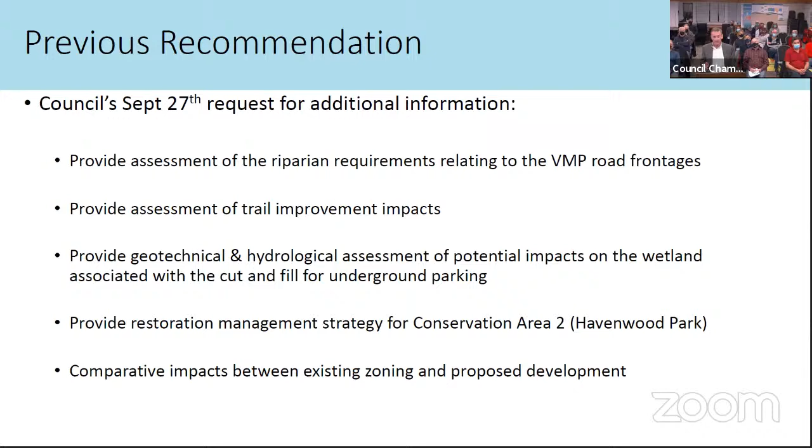If we can go to the next slide, I'll flip through these quickly. These are the motions, either direct or indirect, that came up from the last conversation: about the riparian assessment areas, about the impacts of trail improvements, and item number 3, an important one, related to the hydrogeology and geotech impacts of the underground parking on the wetland. Then the restoration management strategy for conservation area 2, which is the park, and conservation area 1, which is inside the development area but right adjacent to the park. Finally, the comparative impacts between the existing zoning — particularly on the west side of VMP — and the proposed development. Next slide, please.

These were the list of reports that were submitted to you, and you should have in your package. I won't go through them, but they were all accompanied by the resolution or motion that was adopted.

Next slide, please. Again, as was commented earlier, this project has been going on for at least 2 years in a meaningful way. There have been changes made. As you can see on the left-hand side, there's something in the order of 14 scientific or technical studies that have been done. In my experience over 50 years, I have never seen a project that has had that much study done.

And the variety of studies that were done pertaining to this project. And finally, you can see the list of about 10 different consulting firms that have been involved in this project. Next slide, please.

I'm going to ask Patrick to come forward. Patrick is asked to do 2 things, and he will speak to them quickly in the next slide: to look at the impact on the riparian areas, particularly as it relates to VMP and the widening of the road relative to the creek on the east side, and the riparian area on the west side. There was also a strong request to examine the impact of the trail systems proposed within the riparian area, or at least within the extra 15 meters beyond the first 15 meters. So if you could go to the next slide, please.

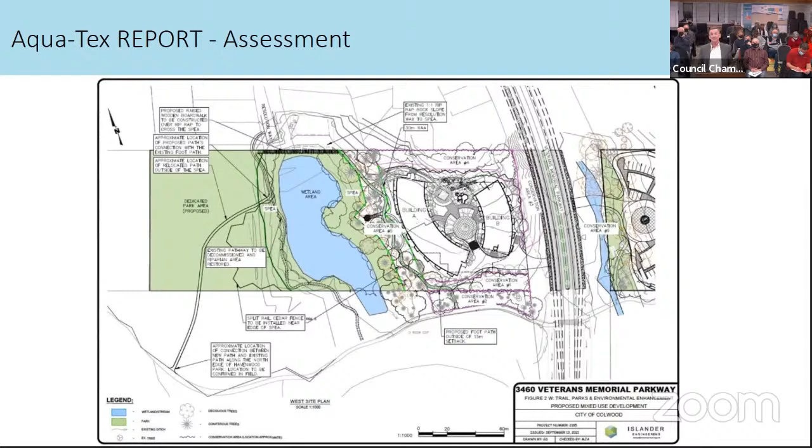These were strictly excerpts from the two studies, and we also asked the blaster to assess it, who has the practical aspect of it. From a geotechnical point of view, the analysis was to look at the rock formation and the potential impact as it relates to the wetland area.

Hydrologically, which was also raised, I might let Michael Payne, who was retained to look at whether there would be an impact on the wetland as a result of the blasting caused by the underground parking, which has 3 layers. I've taken an excerpt from his study, but since this was so important, I'll ask if Michael could say a couple of words. Michael, are you on the line?

Possibly. Yes, I'm here, hang on a second. Can you hear me, see me, a little bit of both perhaps? We can hear you and see you.

Okay, very good. Just a couple of comments on my review. Hello and good evening to the city of Colwood. My name is Michael Payne. I am a professional groundwater engineer and hydrogeologist. My company is Payne Engineering Geology. My background, very briefly: I have 2 degrees from UBC back in the 80s and 35 years of consulting experience.

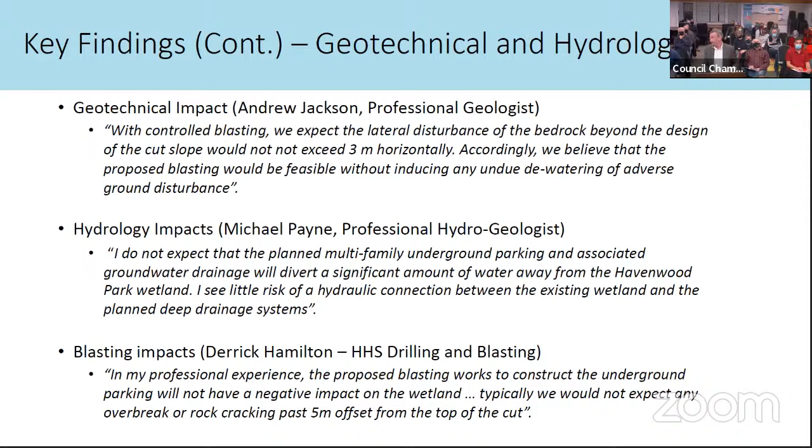I would also say, from a comment made earlier, we have met with Friends of Havenwood Park, HAT, and TLC. Dr. Dunstan was there, myself, Islander Engineering, and Patrick Lucy or his partner. We walked through the entire ecosystem, particularly around the marshland, and had a healthy, good conversation, taking into account some of the concerns raised. What you see in terms of the conservation areas is a reflection of many parts of the comments and feedback we received.

I don't want to spend a lot of time on this, but he's right here, just very quickly, thank you.

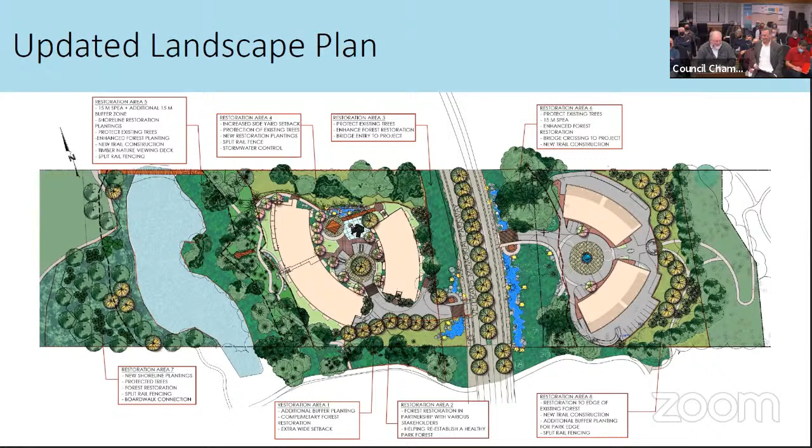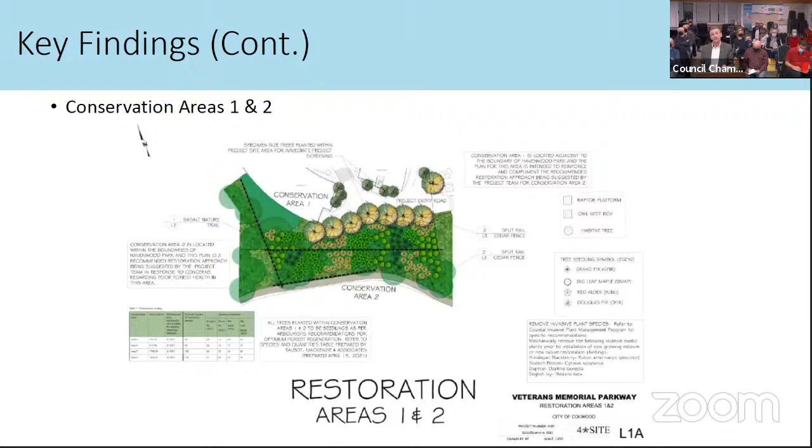And then the next slide. So one of the things that was brought up at the last council meeting was also, and I recognize we're largely looking at the west side now, because that perhaps has the greatest environmental footprint with marshlands in particular. And so there was discussion about what the impact is relative to what could be in the CD22 zone. The CD22 zone on the east side allows for some commercial and housing already, which is what's being proposed.

On the west side, it allowed for a 21 lot subdivision. This was the application plan, which I think the planner mentioned at our September meeting, was the application that was submitted. It had not had final approval, to be specific, but it was submitted based on the CD zoning and what the subdivision plan would permit and what the CD zone would permit. And as you can see on this, there would still be the 15-meter SPEA setback from the wetlands.

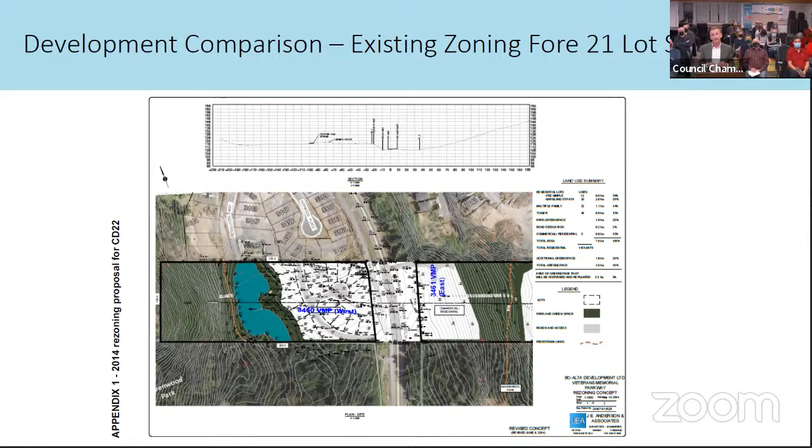But when you look at both the adjacency to Havenwood Park, which is to the bottom side of the screen, as well as to the Resolution Way subdivision to the north, you could see what the existing 21 lot subdivision would look like, particularly as it relates to setbacks. So if we go to the next slide, please.

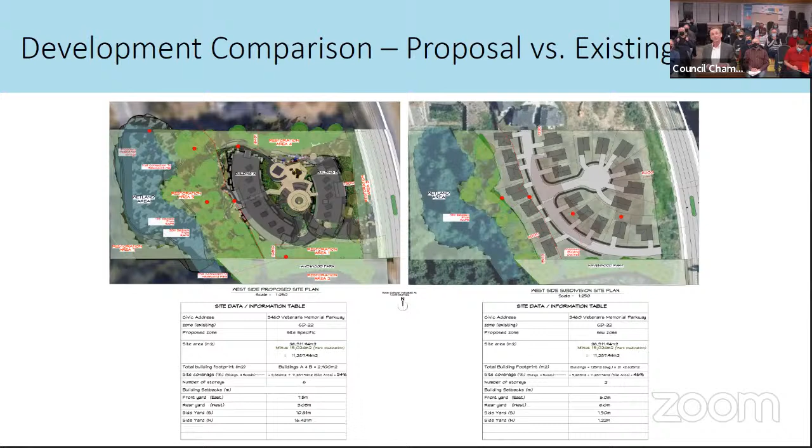Next slide, my apologies. This shows, on the left-hand side, a 3D model prepared by the architect showing how the land rises up. If you were putting in lots, you would see this sort of thing all over the place — this is not fictitious in terms of how subdivisions can take place.

You can see, because of the rise, either at the back at Resolution Way, there would be a retaining wall, not dissimilar to retaining walls you see not too far away towards Sooke Road, or in Langford. So because of the difference in elevation, this is the sort of 3D model you would get.

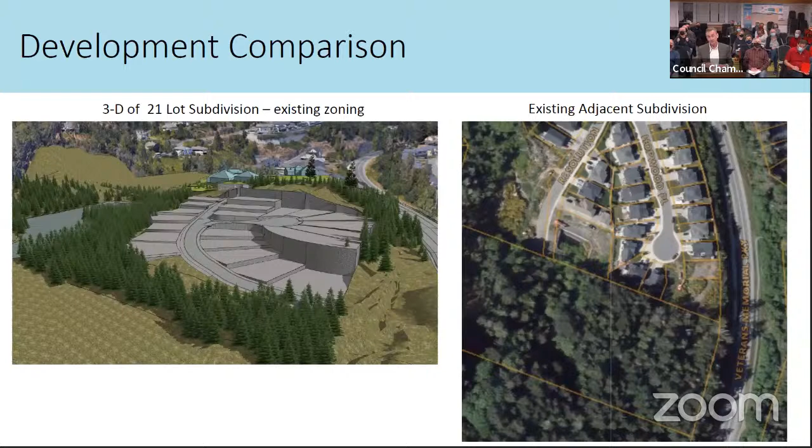And then on the right-hand side, that's just a picture of the existing site and what the Resolution Way subdivision looks like currently, which was built, I think, around 2010.

Next slide. We also tried — this is just a second slide to show, by comparison — they're both the same, but I found the one on the left-hand side was hard to see, so we simply did it more brightly on the right-hand side.

I think it's important to say that the benefits — very hard to see, but the lime-colored green is a pedestrian walkway for the public. There's a pedestrian viewing area right on the Resolution Way subdivision, and a pedestrian boardwalk that would cross over. There's an existing pathway along the north side of the creek, which from an environmental point of view is not a good thing. So you can see how, as soon as it was possible, we moved the pathway away from the park to maintain the environmental integrity.

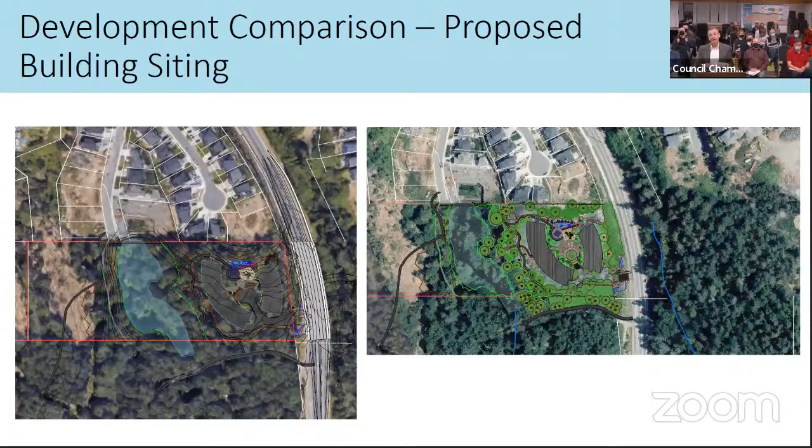And then, of course, there's the entire comprehensive restoration, or at least a plant enhancement plan. If we go to the next slide.

This is the cross section we did for Resolution Way. This assumes that on the left-hand side, you did it the way shown on the previous plan — a single-family dwelling where you didn't bring the road all the way up to the top of the hill, keeping the buildings down. But because you'd be blasting, there would have to be a large retaining wall between this, in this case, the northerly subdivision. As you can see, being a side yard, it only requires a 1.5 meter side yard setback to a property line if it's not facing a street, which it isn't.

So you get a sense of the impact — these have been done by Islander Engineering, using the survey points available to make this as accurate as possible. On the right-hand side, you can see the setback is 10.8 meters, about 35 feet. You can see the 6-story building, and the red line, which would be the cut line for the blasting.

But you then see the large area that is still maintained and set back from the northerly boundary line. Included in that area is Restoration Area 4. So there would be further enhancement to that area as part of the landscape plan that Brad mentioned a bit earlier. I think if we go to the next slide, please.

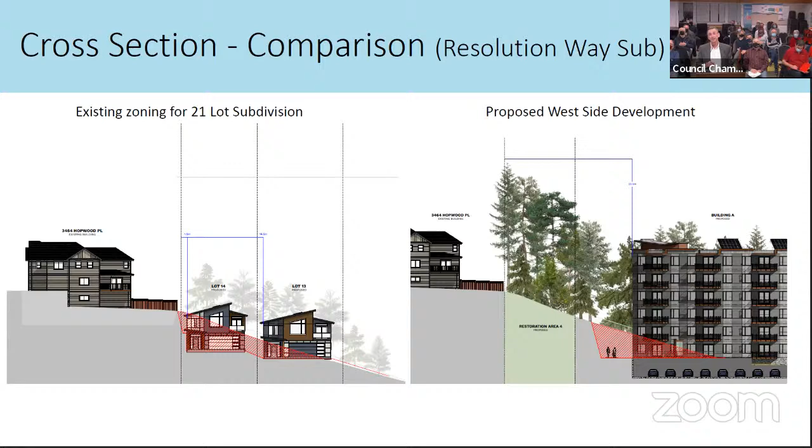This is just a list of the amenities. There's about 4.15 acres of land that's being dedicated to the municipality. There's an additional 3,240 square meters, so that's about 35,000 square feet for those of you like me, within those conservation areas that are in the development that would be conserved and enhanced from a vegetation point of view. There's a total of about 515 new trees.

The area of restoration within Havenwood Park, which was at Restoration Area 2, is about 616 square meters, so it's small. That public pathway I mentioned is about 465 meters long, so 1,500 feet. And there is the pedestrian connection at the Resolution Way right of way. There is to be installed split rail fencing and a public observation deck, plus additional environmental features.

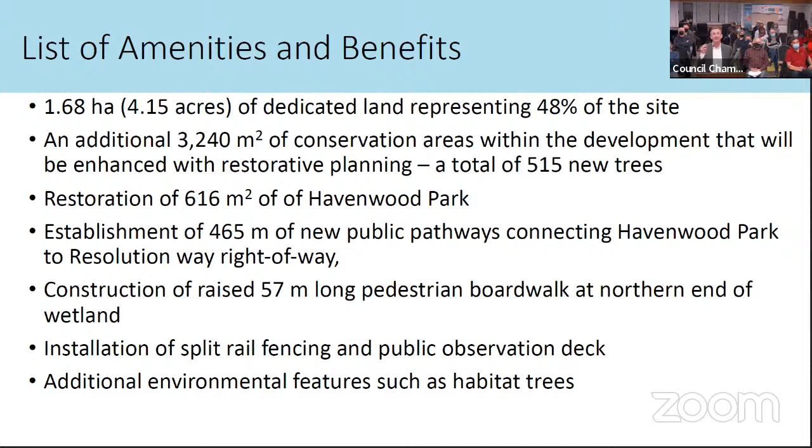Next slide, getting almost to the end very quickly, but just a summary. So there is a CAC direct cash contribution to the General Amenity Fund of $610,000, which is simply consistent with the city's policy. The estimated parkland value, and it does have a value, at a very modest amount in terms of the per square foot that's allocated for that value, is 2.2 million. The cost as proposed or outlined by the landscape architect for landscaping was 624,000.

DCCs, that's the number. Both the sewer and the road frontage are estimates that were provided by Islander Engineering. There are obviously other things over and above this. I didn't get into property taxes, but this gives you a sense of the cost and the contribution to the municipality. Next slide, please.

I guess in closing, I believe in terms of what the motion going back to September was, hopefully we've answered those. I know a couple of members of the audience spoke with respect to the OCP and with respect to density, and I'm a land use planner. I've written plans. I know that they can say all things to all people, but it's very specific that it's in areas appropriate, which I think this is very appropriate for all the reasons that have just been described. It does allow for a 1.2 FSR, specifically states approximately 1.2 FSR, and we're at 1.21.

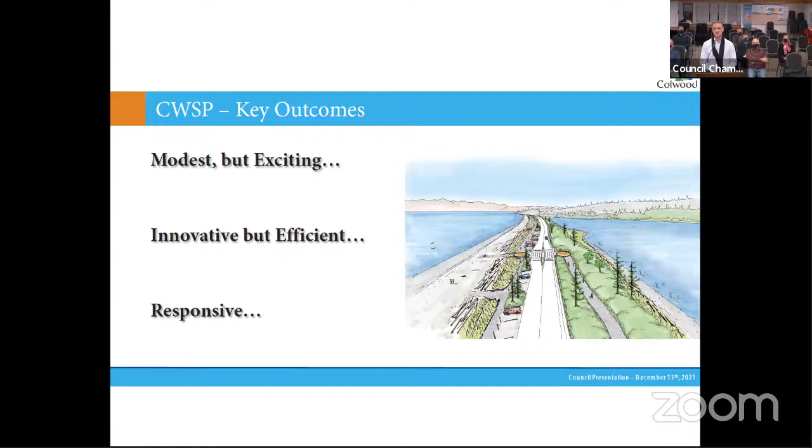So in terms of innovation, as far as I know, this will be the first Green Shores Ready community plan in BC, and I think that that's really exciting. I'm one of a handful of Green Shores accredited professionals in the province right now, and this is a program we're very much promoting and hoping receives more broad adoption. It really centers on these four principles of preserving and enhancing environmental quality. Next slide, please.

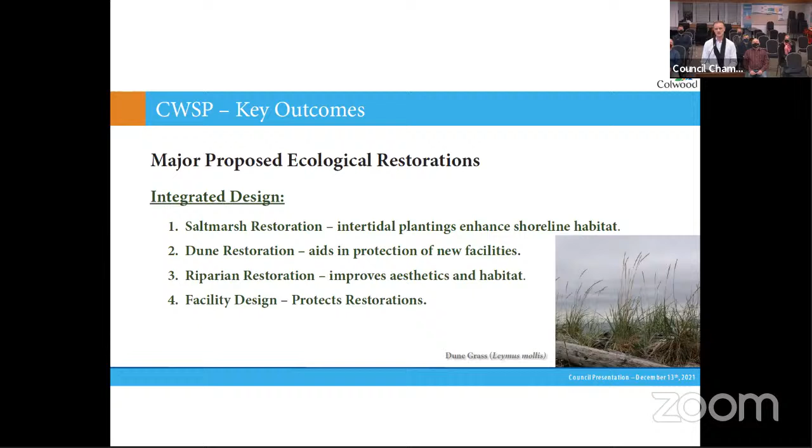The project includes significant ecological restorations, including salt marsh, dune, and riparian restorations. And these ecological enhancements are tied closely to the amenities that are proposed, and they work together. I'll speak to that in a little bit more detail.

This plan has resiliency built into it. We are talking about building in a dynamic, energetic environment, and things like the dune restoration that we're proposing help protect the amenities behind them. Raised walkways are resilient in the face of rising sea levels. It's also set back far enough from the shoreline to be resilient to fluctuations in the shoreline. And even the materials we're selecting are starting to consider long-term resiliency.

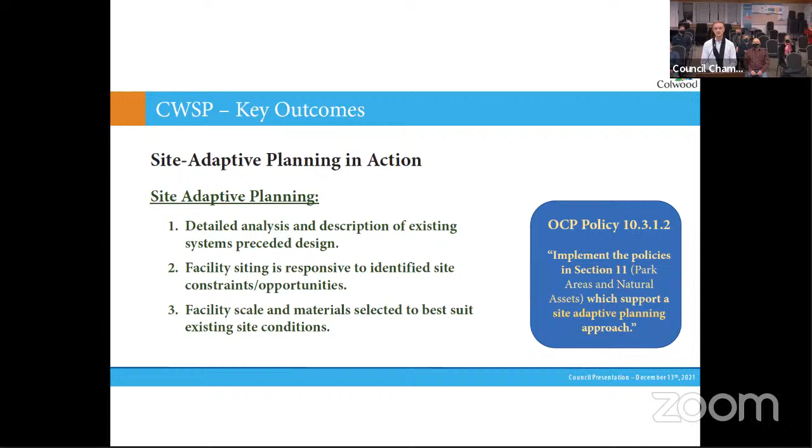I like to think of this plan as site adaptive planning in action. This is a plan that started with a very detailed analysis of site conditions, and all the way through has been responding to what we learned at the outset. So by its nature, it's a site adapted plan.

Safety and accessibility: one thing to note is when we met with the RCMP in the summertime, they identified Ocean Boulevard along Coburg Peninsula as the roadway that generates the most traffic-related complaints in the West Shore, so they were very much advocating for traffic calming measures. We have proposed at a conceptual level traffic calming measures along Coburg Peninsula, which will get fleshed out in more detail through a detailed design process. But certainly traffic calming, safety, and universal accessibility have been considered throughout the development of the plan.

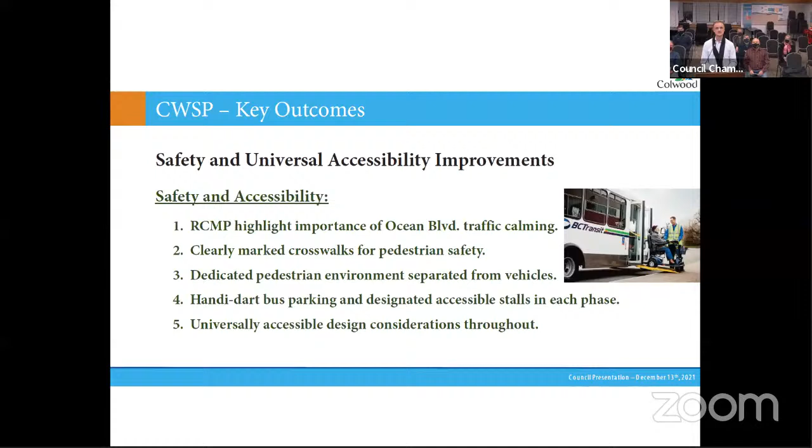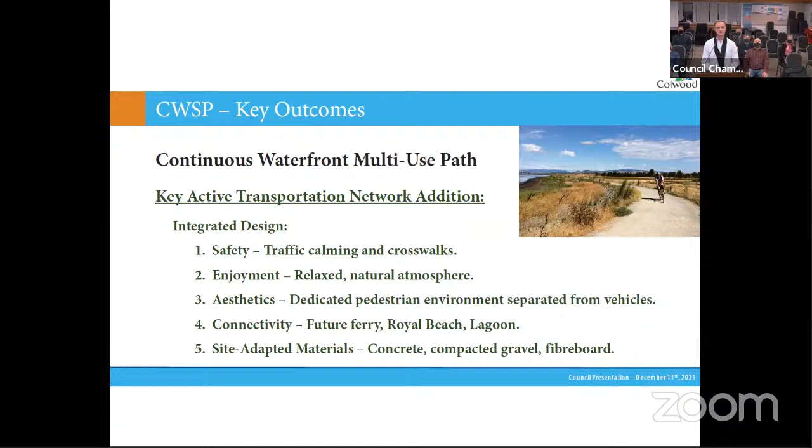The continuous waterfront pathway is integrated into the plan as the core defining element. Currently the plan is designed from the northern edge of Royal Beach all the way up to the bridge at the north end of Coburg Peninsula.

I also like to think of this plan as being very responsive to existing policy. I've mentioned the OCP goal of site adaptive planning, but also the Parks and Rec Master Plan, which was a very helpful guide in developing the waterfront stewardship plan. And of course, our engagement process throughout development has allowed us the opportunity to test concepts with the community, and ongoing First Nations engagement that Mayor Martin had the opportunity to participate in during our last round. It was great to have him participate in those conversations as well.

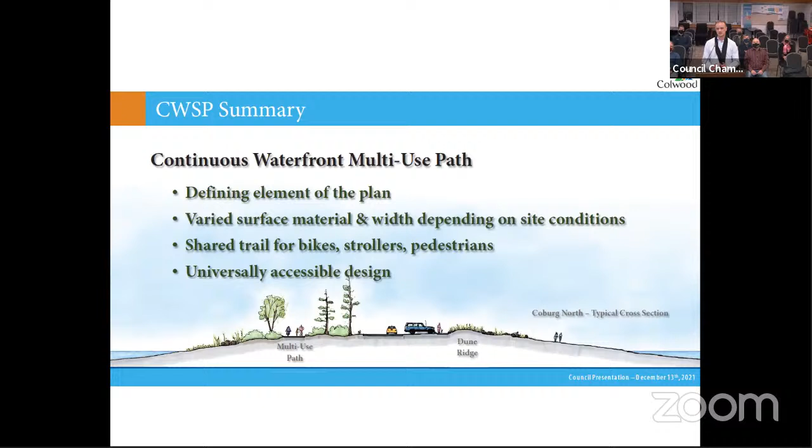I mentioned the continuous waterfront walkway or pathway as the defining element of the plan, and I'd like to start by summarizing it. We anticipate varied surface materials, everything from concrete in the Milburn area to gravel on Coburg Peninsula, adapting to site conditions and energy regimes in those different areas. We see it as a shared pathway for bikes and pedestrians, with universal accessibility design throughout.

The waterfront stewardship plan is divided into six phased sub-areas, starting with the South Beach area from Lagoon Road heading northward along Coburg Peninsula, then the middle section at the Riflery Berm crossing, and then the north section at Coburg Peninsula. Then we jump down to the Milburn section just south of Lagoon Road, and over to the Lagoon West Park. I'll briefly mention that, formerly known as Pithouse Park, we gave it this generic placeholder name as an acknowledgement to comments the Songhees Nation made during our conversation with them—they have an interest in working with Colwood through a renaming process for that park in particular.

So it sounds a bit clunky, but bear with us. The last section would be the boardwalk from the southern tip of Ocean Boulevard down to the northern edge of Royal Beach. Each sub-area plan has background and rationale provided in the report, design elements described in detail and illustrated, general specifications on materials and scale of facilities, and costing provided for each phased area.

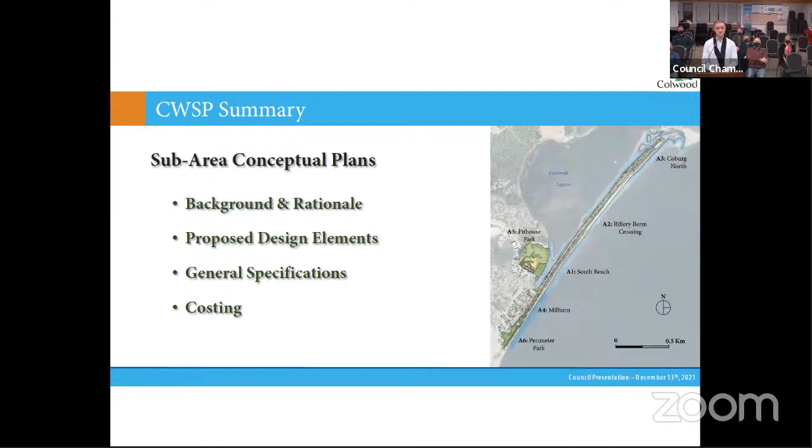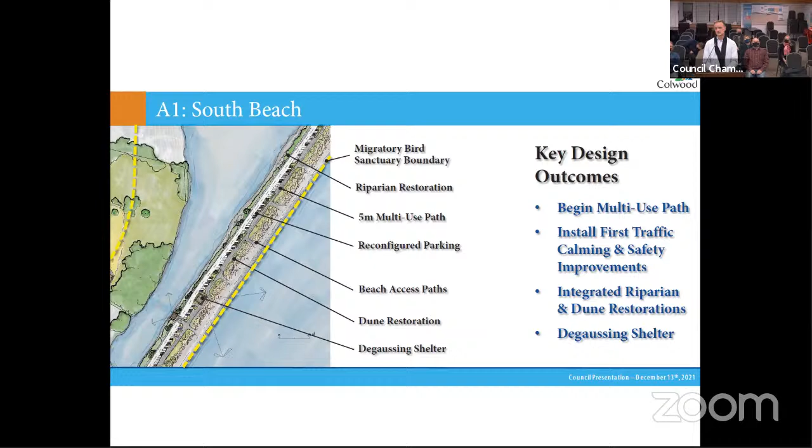I'm not going to go into detail on each of these, other than to reiterate that you could advance through all six sub-area plans—there are six slides here, so you could go forward six slides.

This slide speaks to the WCPC, the Waterfront Coastal Processes Committee, recommended inclusion. The Hope Bridge was removed from the draft plan as presented to the committee. During the last meeting, they put forward a motion to reinstate it. I particularly liked the idea, however it was removed as a result of community input. So that is a second consideration for council to consider.

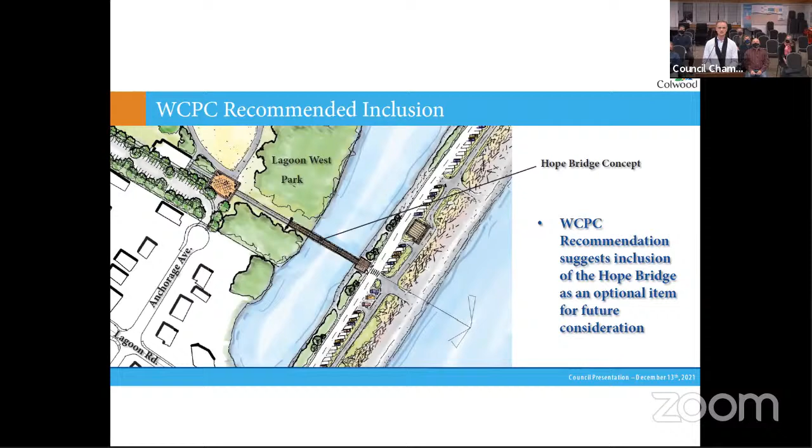Next slide, please. I'm just going to wrap up my presentation by speaking to a few of the costing considerations, and then very briefly touch on implementation of the plan.

When you look at the costing, it's important to note that the costs are specific to open space elements: the pathway, restoration elements, reconfiguration of parking, accessibility improvements, those kinds of things. The dune restoration and riparian restoration are pretty big ticket items, but if they're just thought of as restorations alone, it might seem out of place, but they double as resiliency tools. That's an important consideration when looking at the costing.

The raised walkway for Area 6 at Perimeter Park had a detailed cost estimate developed by our engineering consultant, since we felt it was important enough to do that. However, for some of the other structures in the plan, like covered picnic shelters and other bigger ticket items, we didn't develop architectural plans, so we didn't really have anything to cost per se. We provided lump sum estimates for those structures instead.

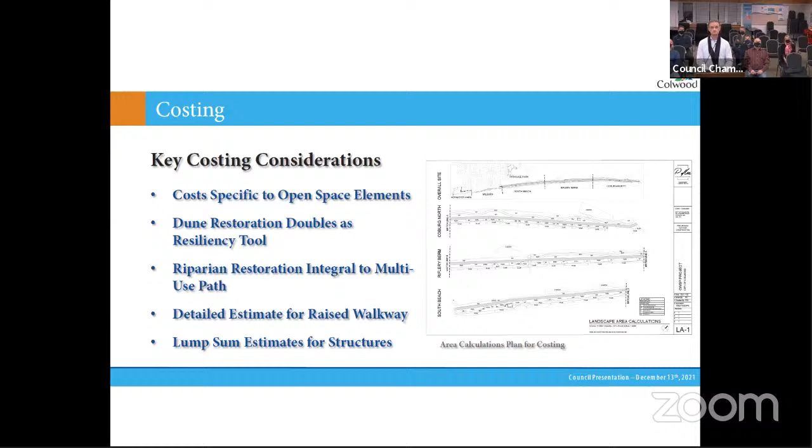Next slide, please. But the number one recommendation in the report is to pursue a beach sediment management strategy. That work has already begun with the Waterfront Coastal Processes Committee—we had a workshop last week looking specifically at this issue.

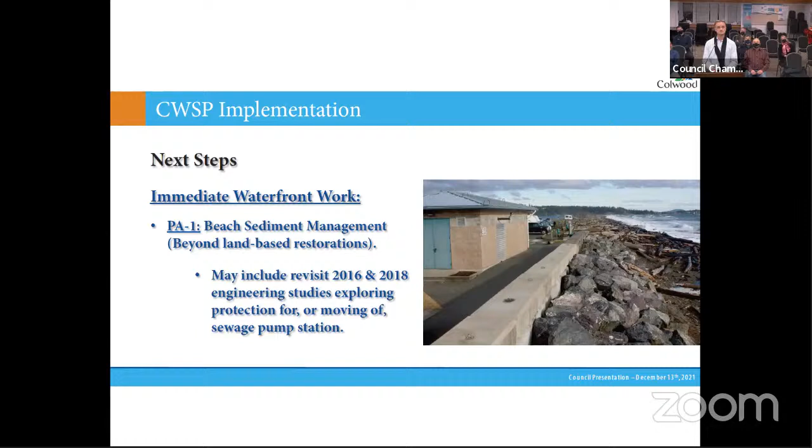Next slide, please. So just to wrap up, the real meat of the waterfront stewardship plan is the construction and implementation phase, which would include development of detailed sub-area plans, refining capital and maintenance costs for consideration, and that would also provide opportunity for pursuing partnerships for specific portions of the plan, permit applications with regulators, and then awarding of construction contracts.

So thank you very much, and I'm more than happy to work with Ian to answer questions.

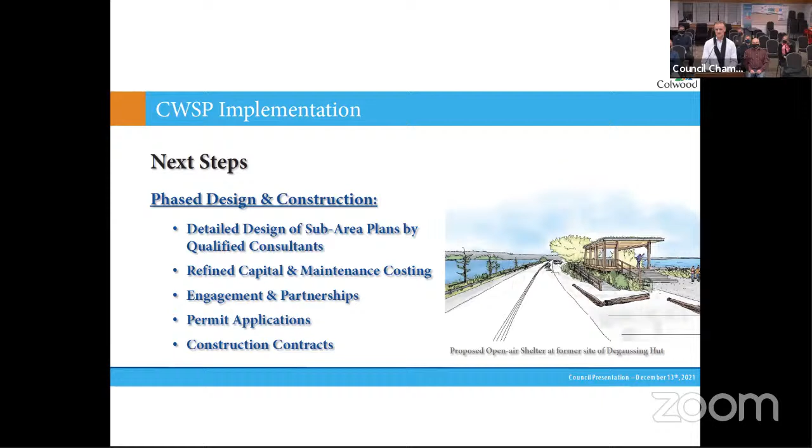Thank you, Councillor Day. Thank you. I am quite concerned with the bridge structure, and I am not up on your latest version of bringing it back, full disclosure, but it's interesting to me. There's been quite a good go at this with the committee with lots of professional help.

Probably 20 years ago when I started in politics, I was the chair of Parks and Rec, and this was one of the things the community wanted to talk about—what our plans were for Esquimalt Lagoon. So we've ended up much at the same place that the community and I ended up at 20 years ago, which is a plan for a raised walkway along parts of the lagoon and a multi-use path. And the consideration then, as now, was how the heck are we going to afford to do all this extra work, because it is an intensive program.

I'm very pleased to see the universal access in everything that you have proposed. But very little recognition has been given to the work already put into the accessible art space, which is where the degaussing hut area is. That was back when $15,000 in the city budget was a large amount of money—that was my entire year's worth of trail upgrades, was 15,000.